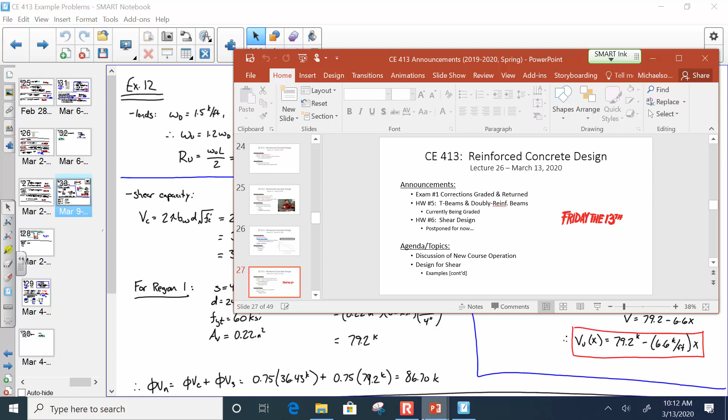Oh, that's sad. They officially canceled the Virginia conference. Yes, they did. Although that isn't too surprising. I was going to send something out to the students here in a little bit, but I didn't have time between now and class. But yeah, it is officially canceled.

Let's get right into it. So what I want to do today, my goal for the lecture, is to do a shear design. We're going to do a simple problem. This is a simply supported beam with a uniformly distributed load.

I went ahead and already factored the load. This is a lot of load, it's got a lot of oomph on it, 11.5 kips per foot. It's pretty intense. It's a 20-foot long beam, simply supported, 4 KSI concrete, 60 KSI steel. What I want to do is the shear design.

By shear design, what I'm talking about is laying out the stirrups, okay? So how do I lay out the stirrups across the span? I'm going to walk you through how to do that. It's really not that hard, just a little bit unique.

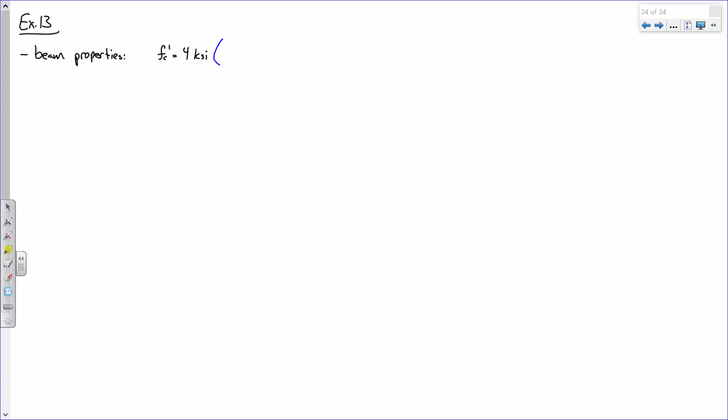Okay, so let's look at this beam. Now keep in mind, f'c is 4 KSI. We're dealing with normal weight concrete, which means lambda is 1. We have a yield stress of 60 KSI. Our beam has a width of 16 inches and a depth of 25 inches.

We also know we're being subjected to a factored load, already including dead load and live load, of 11.5 kips per foot. The beam is 20 foot long. Now let's make sure everybody's crystal clear on what's going on from an analysis standpoint. I have a simply supported beam with a uniformly distributed load. So here's the beam.

So 11.5 kips per foot, and this beam is 20 feet long. Would you agree that the shear diagram is going to look something like that?

Now the first step of this problem is to produce this shear diagram, but it's going to be much more detailed than what we have here on the board. I'm only going to focus on half of the shear diagram, and there's going to be a lot more values that go on it. We're going to need the equation for the shear diagram. Let me turn the lights down so it's easier to see the screen.

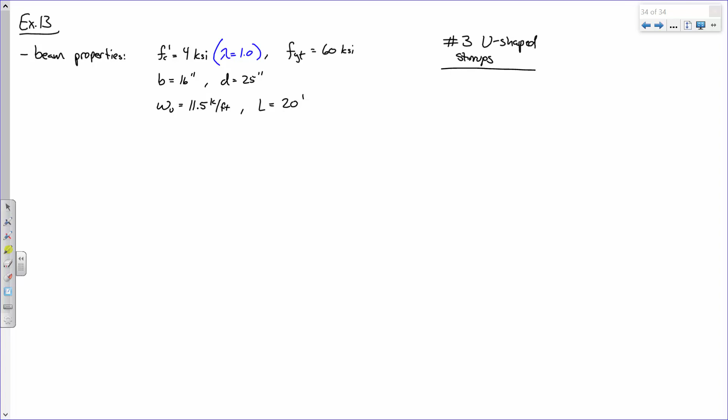Lastly, we know this problem has number 3 U-shaped stirrups, so the area of a number 3 bar is 0.11 square inches, meaning the area in shear is 0.22. We did that last time. Remember, when you have a beam with stirrups that go like that, that's a U-shaped stirrup. If I cut a section, how many bars am I going through? One, two. So AV is 2 times the area of the bar, which is 0.11, so A sub V is 0.22. Everybody okay with that?

All right, good. Now step 1 is to construct a shear diagram. This is an involved step. Okay, so let's look at this.

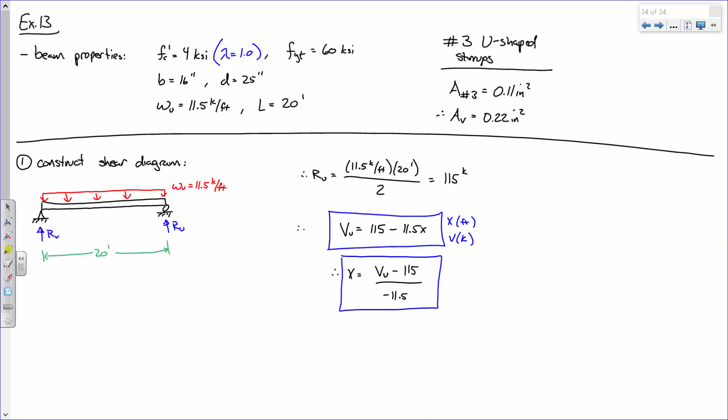Now, we could be a little more exact in our statics and cut a section, but we did that in our last example. I kind of want to just make sure I'm making progress. So everybody's okay with these equations? All right.

Next thing I want to compute is some concrete capacity, and you're going to see why. So VC, if you remember, the equation for VC is 2 lambda times BW times D times the square root of FC prime. In other words, I'm trying to design the stirrup layout, how much steel I need. Well, I'm not going to have an adequate understanding of how much steel reinforcement I need unless I know how much the concrete can carry on its own, so that's what VC is.

So this is 2 times 1 times 16 inches times 25 inches times the square root of FC prime. Remember, when you see a square root of FC prime, you put in PSI, you get out PSI.

Help me out, for those of you crunching buttons, what are the units going to be when you calculate all this out? Pounds. It's a shear, so it's got to be a force, and it's in PSI, so it's pounds. 50,000... 596.44, so we'll say 50,596 pounds, which also equals 50.596 kips. Okay?

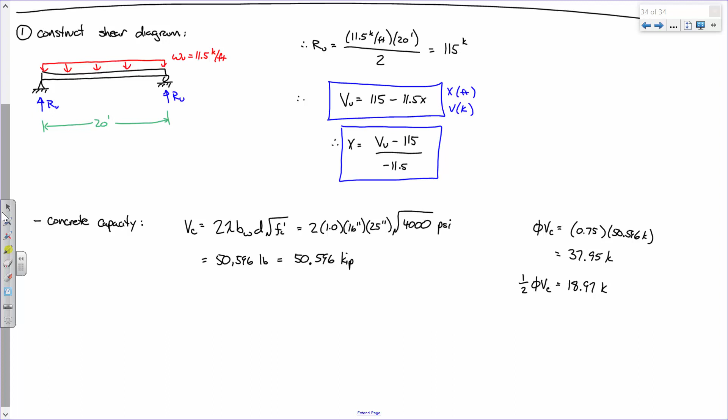Okay, I don't want to just be computing values for the heck of it. I want to refer back to the notes and make sure you all know what I'm doing. If you remember your procedure for shear design, the first thing you need to do is construct the shear diagram. And when constructing it, you have to figure out where your shears are bigger than that value, where they're between these two values, and when they're smaller than that value. Hence why I computed the phi VC and the half of phi VC. Does that make sense? I didn't want to just be doing stuff for the heck of it.

Okay? Now, here's the thing. Let me look over here. I'm going to cheat and use this. Okay? Let me blow this up. Don't worry, I'm going to draw a much neater one here in a second. But let me blow this up a bit. So...

All right, so this is 115, right? Okay, and this is x equals 0, right? Now, how long was the beam? 20 feet. So this is x equals what? 10 feet.

All right, now I have a PVC value and a half of PVC value. Phi VC is about 37.95. So if this is 115, that's about right there. Maybe that's PVC, and this is half of PVC.

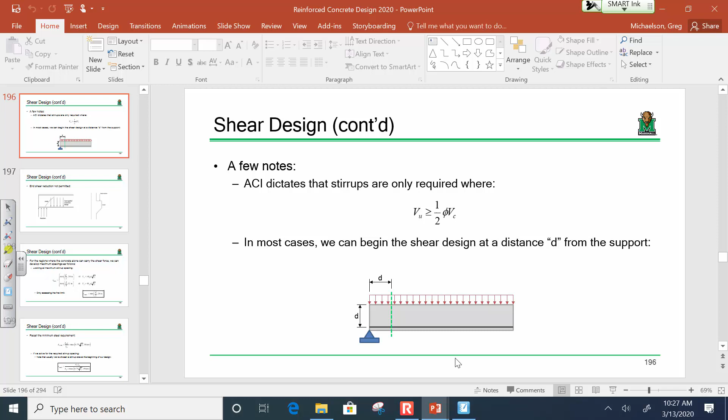So in order to properly construct our shear diagram, we need three values. We need to know what this is, and we need to know what these are. Okay? Remember how I derived those two equations in the blue boxes? Now you can see where they're both becoming useful. I'm going to use this equation to figure out VU star, and this equation to figure out where phi VC and half of phi VC are. Sound good? So let's go ahead and do that.

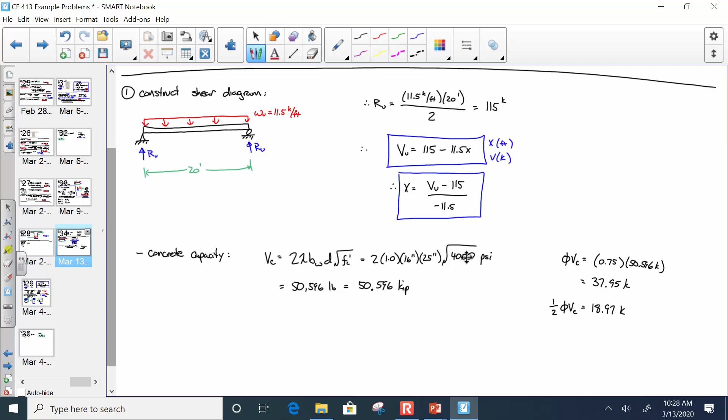All right, so we will call this important plot values.

Is it silly of me to look at it and see it as similar triangles though? You basically are. Would we be able to just do it that way? Absolutely, that is absolutely correct. You could use a similar triangle expression to do that. The one thing to be cautious of is, what if you have a distributed load? But you also have point loads. So what happens is, if you plot that shear diagram, so on and so forth. So just be wary of what you're doing. But can you use similar triangles? Absolutely, just as long as you're reflecting the right distances accordingly, like X has to be measured from the left. Right, but yes, you can.

Sound good? So what we're going to say here, first off, we're going to do VU star. So that's VU at X equals D. So I'm going to use the first expression. We'll say 115 minus 11.5. And what was D? 16 inches. No...

25. 25. But you're right about what you were getting ready to say - this is 25, but that's 25 inches. So you need to multiply that by 1/12. Okay? So if you want kips per foot, that's converting inches to feet. So you're exactly right. So what does VU star come out to be?

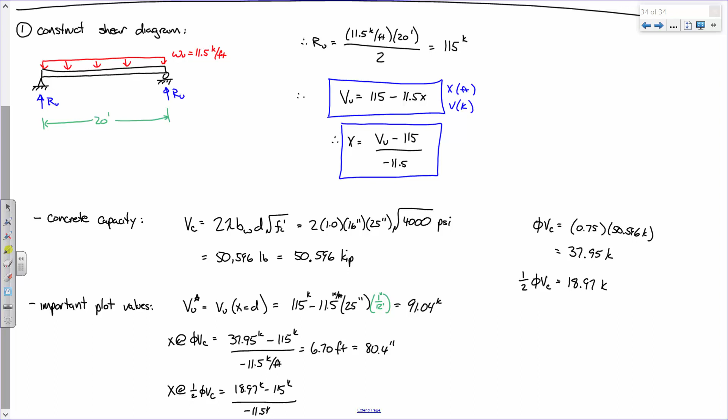And last, what happened there? X at half of phi Vc is 18.97 kips minus 115 kips over minus 11.5 kips per foot. Let me just extend that page. And that equals what? 8.35 feet, which is what? 100.2 inches.

100.2 inches. Okay, so what do I have here? This is 80.4 inches, this is 100.2 inches, and instead of this saying X is 10, I'm going to say 120 inches. Does that make sense?

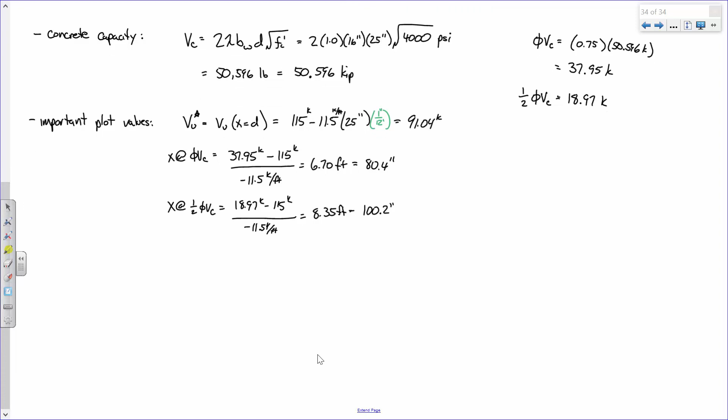So, from a design standpoint, this is what our shear diagram is going to look like. Bear with me, this is going to be a big plot, but it's kind of going to be repeating what is there on the screen.

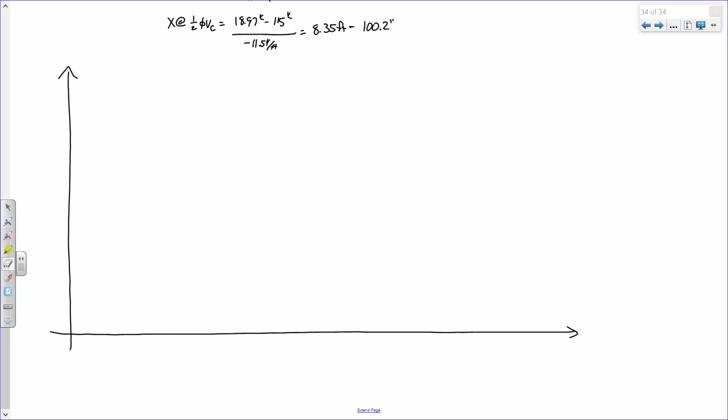Okay, so on this axis is the shear in kips, and this axis is the distance in inches. And so the shear diagram looks like that. But what we're going to do is sort of draw it like this. Bear with me. That's how we're going to draw it.

In other words, I know full well that it continues. So I know this is 115 kips, but I don't care about that. I only care about this, which is 91.04 kips. So that stuff that trails up, don't really care about it. And recognize that this line right here, that is the center line of the beam.

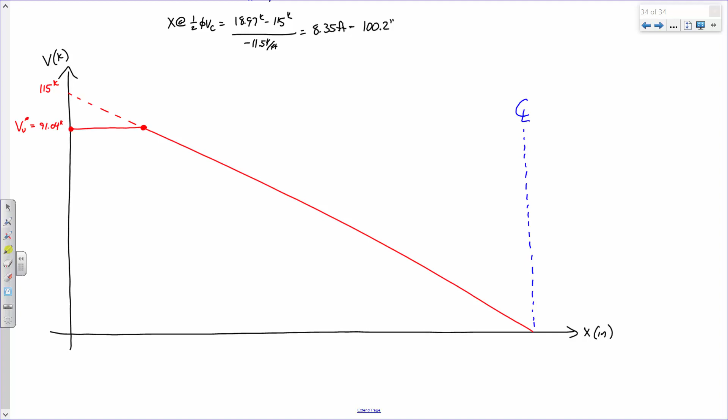Last, we've got our distances here. I know that this is X equals D, which is 25 inches. And I know that I've got this going on. This one, this is... go away. So this is phi Vc, which is 35 point... what was it?

37.95. This is 37.95 kips. This is half of phi Vc, which is 18.97 kips. And this X equals 80.4 inches. X equals 100.2 inches.

What do you think? Now, the next thing I'm going to do is I want to make sure everybody's okay with constructing this. Now, what I want to do is go back to this part right here.

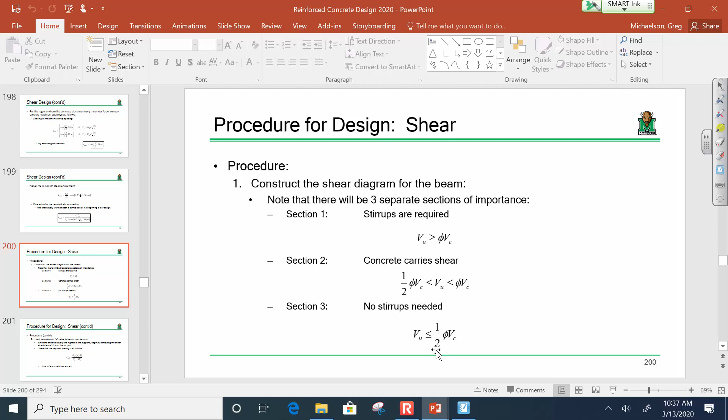What can you tell me about this region? We don't need any stirrups. Okay, so what I'm now going to do is go to my shear diagram and indicate that accordingly.

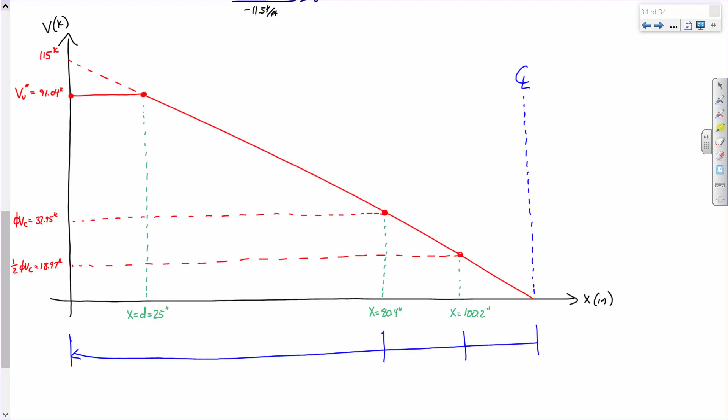So I'm going to say, okay, no stirrups. Here, right here, this is stirrups required. And this is use S max. In other words, we don't need stirrups, but the code says we have to put them there, so I should be using S max in that region.

And we are going to use S max in this region, but we might actually use S max a little bit over here as well, and you'll see where that comes into play. So what's the takeaway? We should be placing stirrups from X equals 0 to X equals 100.2.

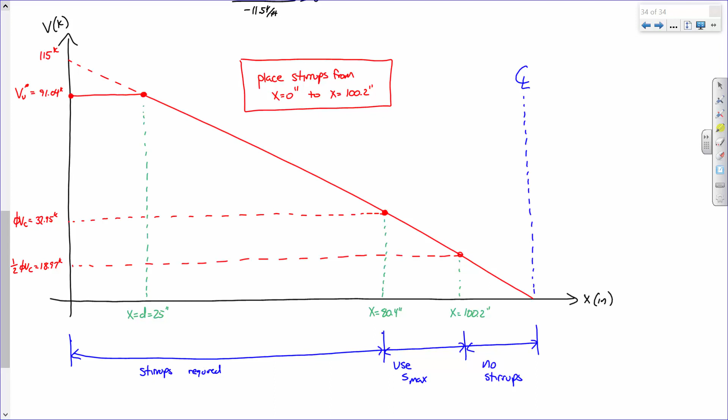So far, so good? All right, does anybody have any questions so far? Okay. All right.

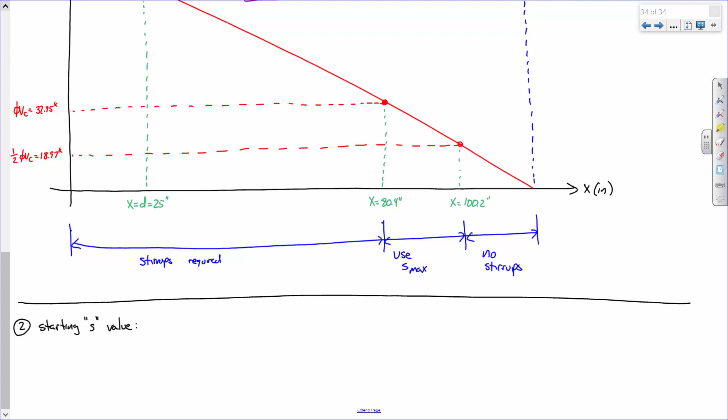Now, step 2 is to figure out the starting S value. Now, how do I do that? I use the following equation.

There's nothing magic about this equation. All this is saying is phi Vc, and then Vs is Av fy d over S, just solving for S. I'm going to use my starting S value, which would basically be designed for the highest shear. The highest shear is not that, it's this, because this is where we start the design. So I'm going to use that shear value and figure out what stirrup spacing is required to resist that shear.

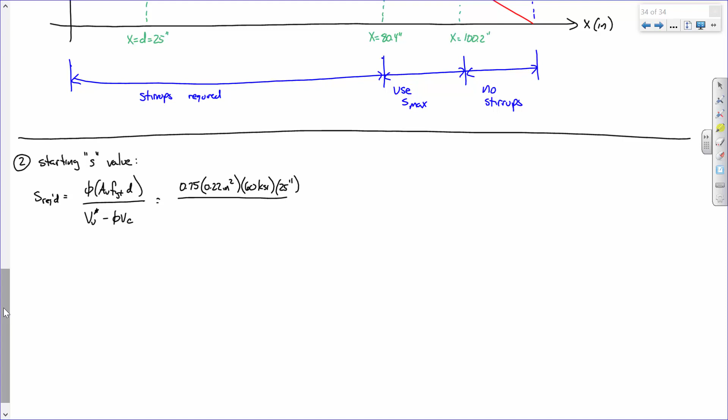Is everybody okay with this? I wrote the equation out a little fast.

Do I have an answer? 4.66. Okay, now does that mean we use S is 5 inches? No, you always round down. So that's point one, you always round down. Then we get into a question of, well, do I use 4.5 inches or do I use 4 inches? And I'll tell you, use 4. The reason why is because the math we're about to do becomes a lot easier, you can do it in your head a little more easily if the numbers are whole numbers. So use S is 4 inches.

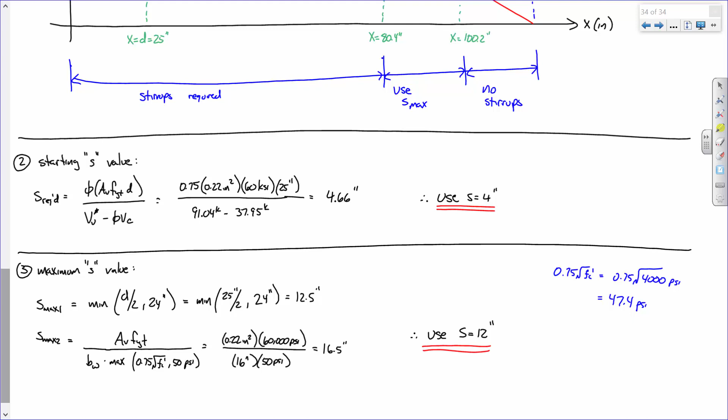Okay, all right, we're going to do this design and then we'll call it. If I go a little over, I apologize, but this is kind of important. Is everybody with me so far on the design process? Okay, so let me explain what's going to happen. So here's the beam.

The idea is that we're going to use 4-inch spacing, and then there's going to be a point where we stop using 4-inch spacing and start using 12-inch spacing. Remember, when you're looking at a shear design for a beam, you start out with really, really tight spacing, and then as you get closer to the middle, you start using wider spacing. So we need to figure out when we can start using S equals 12. So step 4 is going to be: determine the range for S equals 12, and let me show you how we're going to do that.

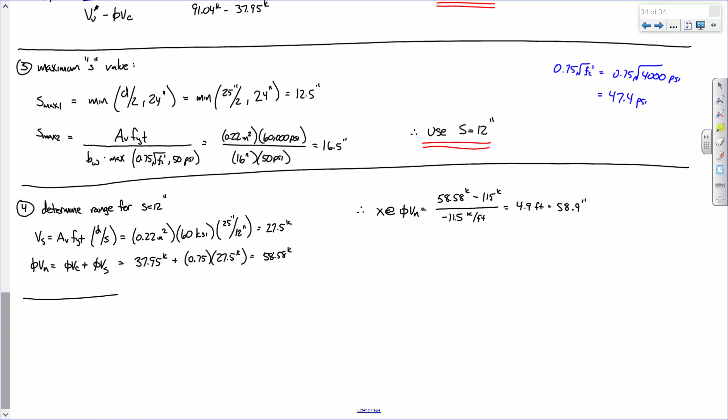So, all right, I want to show you then how we design. And then we're going to call it. I know we're running over, but we're right there.

Okay, it is very, very typical that whenever you're starting a design, that you place your first stirrup 2 inches away, at 2 inches from the support.

The idea why is that, okay, what was our S required? 4 inches? So the idea is like, here's your concrete beam, here's the support, that's sort of the line for the support. The idea is that you place your first stirrup at 2 inches away, because you have another one back here, so you have a continuous start to your spacing. So 2 inches is very, very common spacing for your first increment.

So watch what I'm going to do. I'm going to place the first stirrup at X equals 2 inches. Then I'm going to use 4-inch spacing until when? I'm going to use 4-inch spacing until I don't need to anymore, which is 58.9.

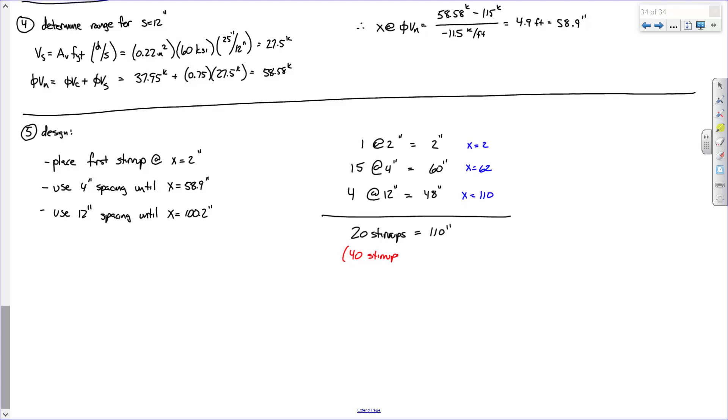What do you think? I know I went through that kind of fast, but that's a little different, isn't it? So what's your answer? That's your answer. So the idea is, okay, I've got my first stirrup at 2, and I do 1, 2, 3, 4, 5, 6, 7, all the way to 15, and then I do 1, 2, 3, 4, and then I'm done. And that is the design. That is the stirrup design for this beam. What do you think?

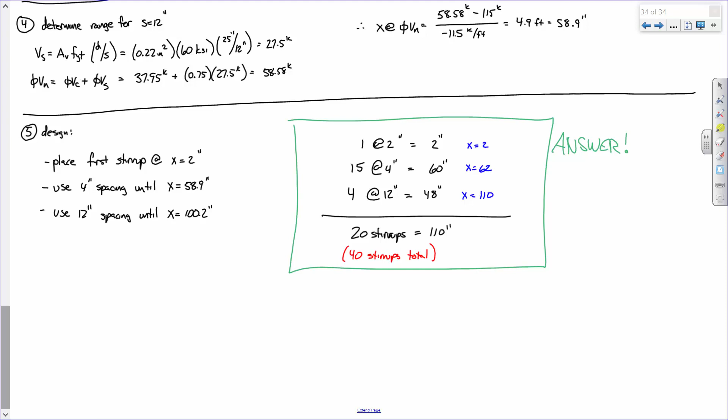That's a little bit different, but that's kind of a new process. That is how to design for shear. The only way that we can improve that is to maybe add like a 6-inch spacing or an 8-inch spacing. And the only reason you would ever want to do that is if it would reduce the total number of stirrups. But there's a point when it's like, okay, well, how much should we reduce it? There's something to be said for simplicity as well. Does that sound good? Okay, let me go ahead and stop the recording.